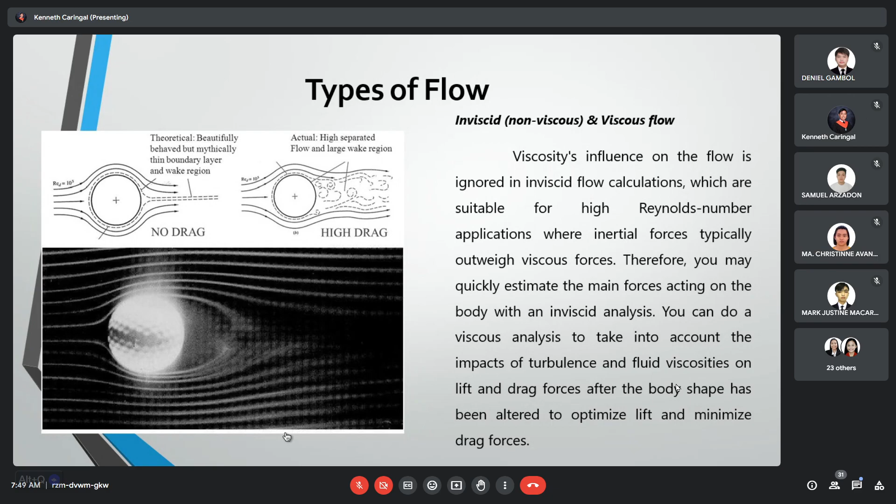Continuing, another area where inviscid flow analysis is routinely used is to provide a good solution for problems involving complicated flow physics or complicated flow geometry. This helps by means of our shape of geometry.

In a case like this, the viscous forces are important, but in the early stages of calculation, the viscous terms in the momentum equations will be ignored.

As you can see in our figure, in theory, there is a beautifully behaved but mythically thin boundary layer and wake region experienced. But in reality, there is a highly separated flow and large wake region. As shown in the actual visualization of this sphere, there is separated flow happening behind it.

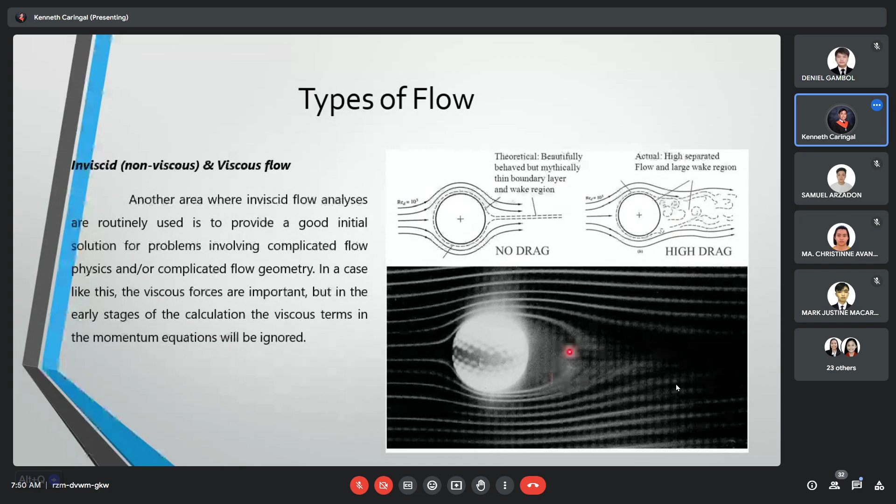Viscosity, or mu, is the ability of a fluid to withstand shearing pressures, and its propensity to stick to solid surfaces is known as viscosity.

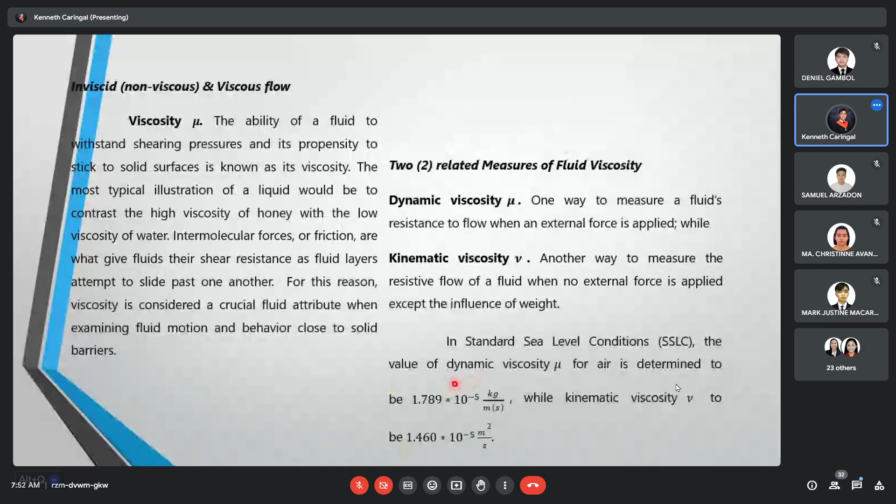Next is the boundary layer. Because of the friction that exists between the gas and the solid material surface, the boundary layer sticks to the surface. In other words, the flow is zero at the surface and there is a small area of retarded flow nearby.

So this is our boundary layer.

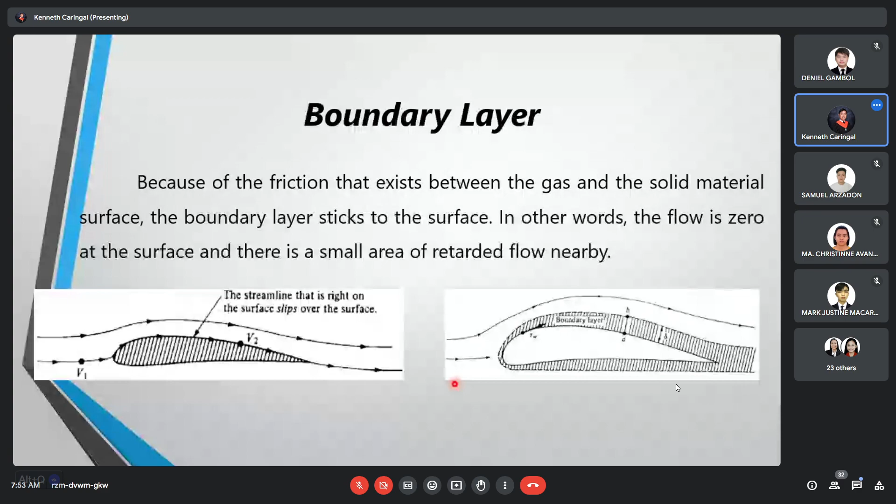The boundary layer thickness d grows as the flow moves over the body. That is, more and more of the flow is affected by friction as the distance along the surface increases. In addition, the presence of friction creates a shear stress at the surface, tau. This shear stress has dimensions of force over area and acts in a direction tangential to the surface. Tau gives rise to a drag force, skin friction drag. That's what creates skin friction drag.

This figure explains the example of a boundary layer where at this point, the velocity is zero. Then the velocity rises up to the free stream. That's why it's elongated - this is at the surface.

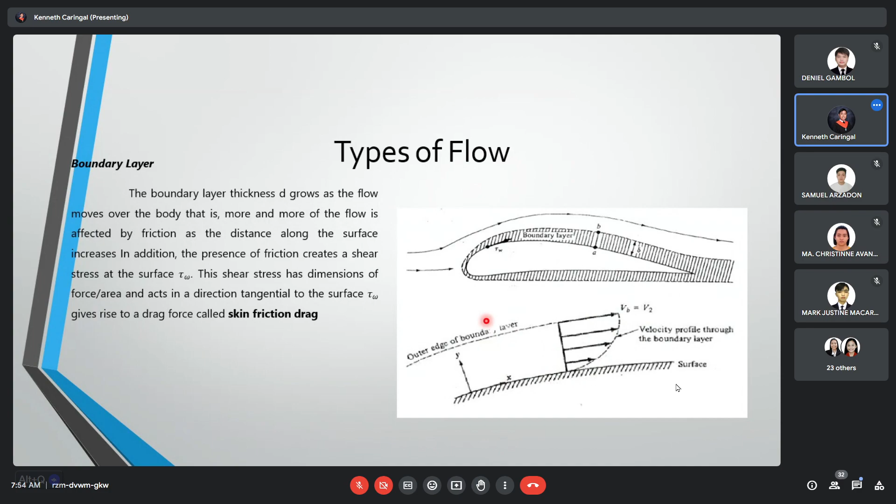Some factors that affect the type of flow in the boundary layer are: first, the smoothness of flow approaching the body; second, the shape of the body; third, surface roughness; fourth, pressure gradient; fifth, Reynolds number; and sixth, heating of the fluid by the surface.

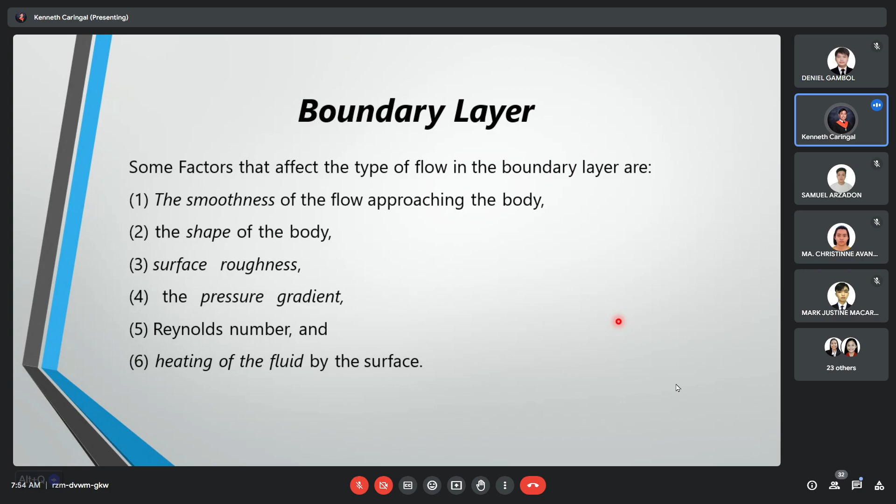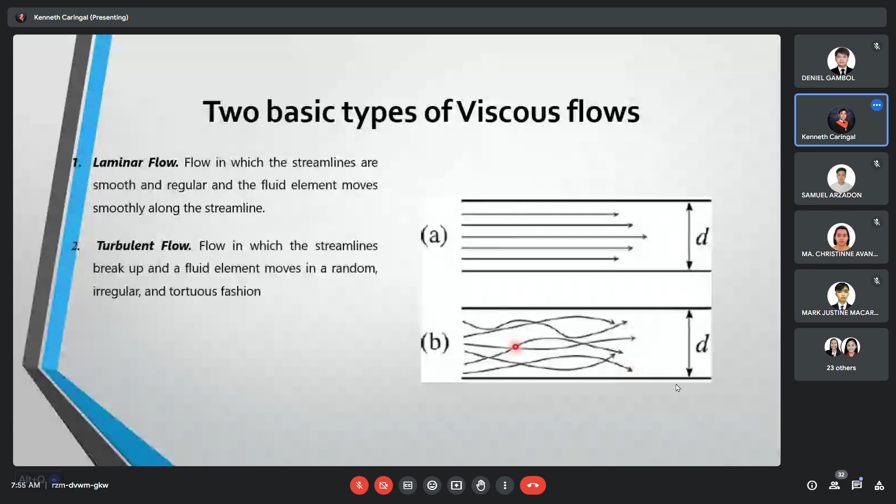Next is yung Reynolds number. Reynolds number is the measure of the ratio of inertia forces to viscous forces. Reynolds number can be used to assess how comparable the aerodynamic flows are in a body and its scaled counterpart. This value can also be used to determine whether the boundary layer is turbulent or laminar in whole or in part.

So meron tayong formula dito. Reynolds number is equal to rho v L over mu, wherein yung rho mo is yung density ng fluid, yung L is yung characterizing length of the flow system, usually the diameter of a pipe. O kaya naman pwede siyang rho vc, wherein yung C mo is yung C denotes as yung chord length. V is yung velocity of the flow, tapos mu is yung viscosity of the fluid.

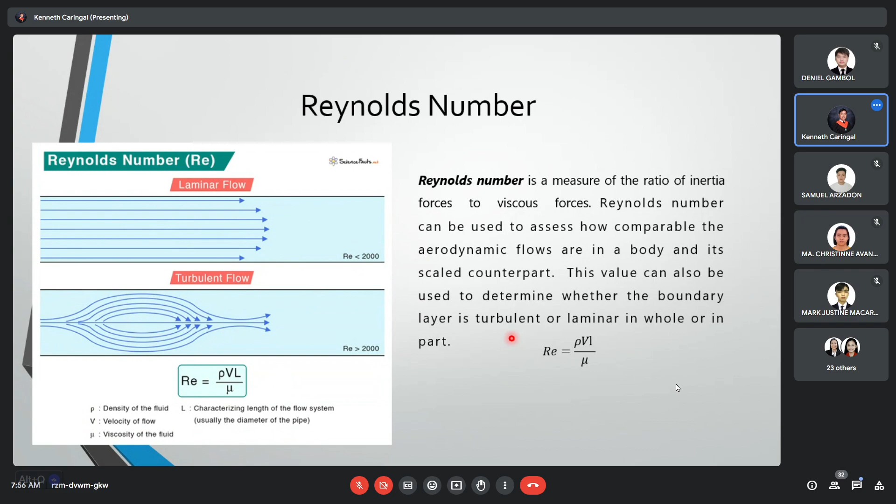So ito may sample tayo. Find the Reynolds number for a model wing of a 3-inch chord. Tests run at 100 miles per hour with standard air. So, given yung chord natin na 3 inches, may velocity tayo na 100 miles per hour at standard sea level conditions.

So, first is i-declare natin yung ating formula, which is yung rho vc over mu or rho vl. Reynolds number is equal to yung rho 0.002377 slugs per feet cube. Tapos 100 miles per hour times 88 over 60. Kaya siya 88 over 60 kasi ito yung conversion factor natin from miles per hour to feet per second. Pwede din naman 22/15, pareho lang din naman yun. Tapos 3 inches times 1/12, which is conversion sa feet natin from inches. All over 3.7373 times 10 to the raise to -7 slugs per feet second.

Tapos ito yung value nung na-convert na, 146.667 feet per second tsaka 0.25. So since na-convert na, pwede na nating i-calculate diretso. Ang ating Reynolds number is 233,207.574.

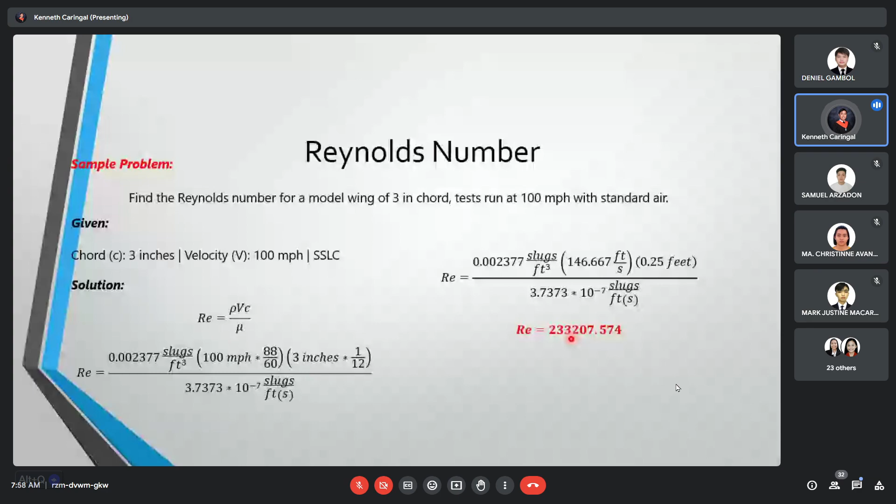So velocity profiles for laminar and turbulent layers. Dito i-discuss natin yung relationship between laminar and turbulent shear stresses. The skin friction exerted on an airplane wing or body will depend on whether the boundary layer on the surface is laminar or turbulent, with laminar flow yielding the smaller skin friction drag.

Laminar flow can be obtained in the design of the shape of an airfoil. This special type of airfoil designed to encourage yung laminar flow is called yung laminar flow airfoil. Tapos yung standard shape airfoils naman are more prone to having turbulent boundary layers and hence mas malaki yung skin friction drag na nag-occur sa kanila.

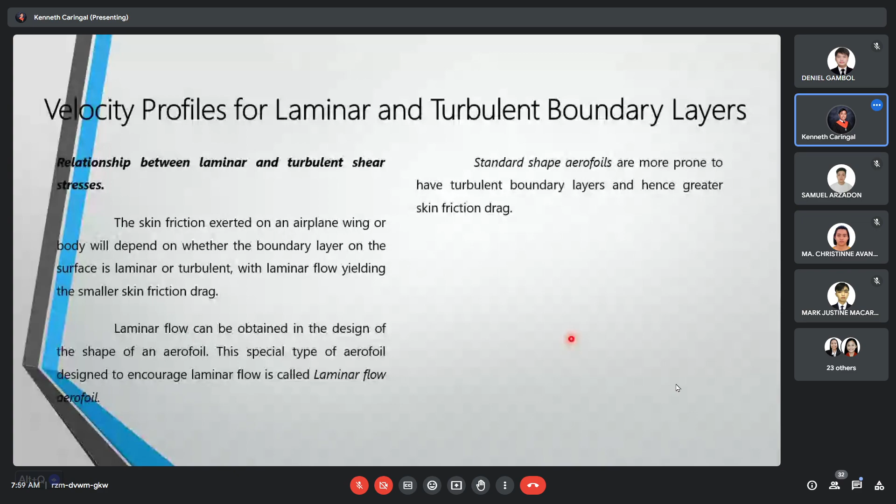So advantage and disadvantage of laminar airfoil. Advantage ng laminar is low skin friction drag. Tapos it has high speed properties postponing to a higher flight Mach number, and the large drag rise due to shock waves and flow separation encountered near Mach 1.

Tapos yung disadvantage naman nun is it readily gets unstable and tries to change to turbulent flow. Example is yung slightest roughness of the airfoil surface caused by real-life effects as protruding rivets, imperfections in machining, and bug spots can cause premature transition to turbulent flow in advance of the design condition.

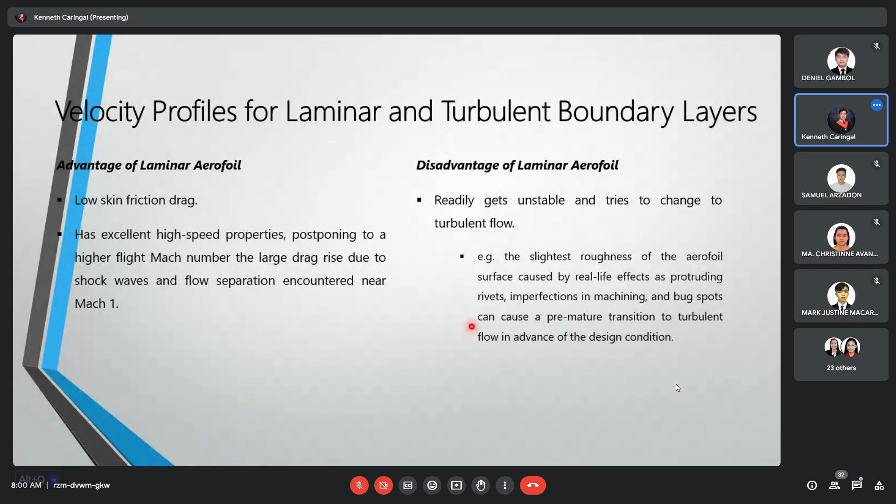So ito is yung formulas natin para sa laminar boundary layer. First is yung laminar boundary layer thickness, which is equal to 5.2 times x all over square root ng RE sub x. Wherein yung RE sub x natin is yung local Reynolds. Tapos yung RE sub L natin denotes as yung total Reynolds.

Tapos, laminar local skin friction coefficient or CFX is equal to 0.664 divided by square root ng ating local Reynolds number. Tapos yung laminar flow's total skin friction drag coefficient CF is equal to 1.328 all over square root ng ating total Reynolds number. Tapos yung drag force natin is QSCF.

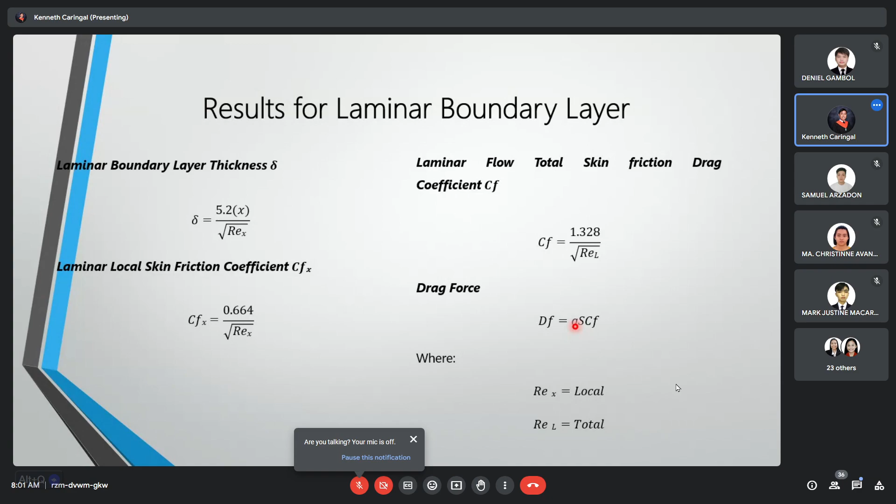So, ito may sample problem tayo. Consider the flow of air over a small flat plate that is 5 cm long in the flow direction and 1 meter wide. The free stream conditions correspond to standard sea level and the flow velocity is 120 meters per second. Assuming laminar flow, calculate the boundary layer thickness at the downstream edge. So first, i-declare natin yung ating given na 5 cm, tapos yung velocity is 120 meters per second.

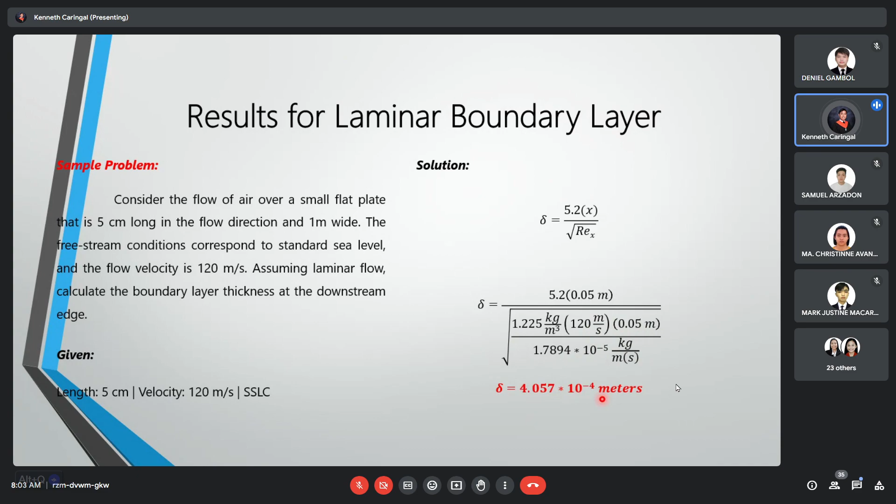So ito yung laminar boundary layer thickness is equal to 5.2 times x all over square root ng local Reynolds number. So 5.2 times 0.05 meters, ito ay nanggaling sa conversion ng 5 cm to meters. Tapos square root ng Reynolds, which is rho VL over mu in SI, 1.225 kg per meter cube, quantity 120 meters per second times 0.05 meters all over 1.7894 times 10 raised to negative 5 kg per meter second. So ang ating laminar boundary layer thickness is 4.057 times 10 raised to negative 4 meters.

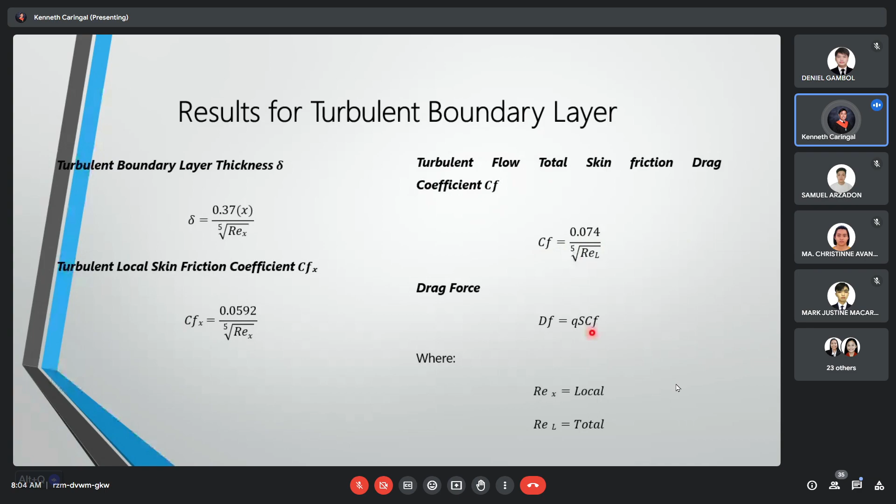So same given tulad ng kanina, pero ngayon ang kukunin naman natin is yung turbulent boundary layer. Turbulent boundary layer thickness is equal to 0.37 times x all over fifth root ng local Reynolds number. So turbulent boundary layer thickness is equal to 0.37 times 0.05 meters all over fifth root ng 1.225 kg per meter cube times 120 meters per second times 0.05 meters all over 1.7894 times 10 to raised to negative 5 kg per meter second. So ang ating turbulent boundary layer thickness is 1.395 times 10 to raised to negative 5 meters.

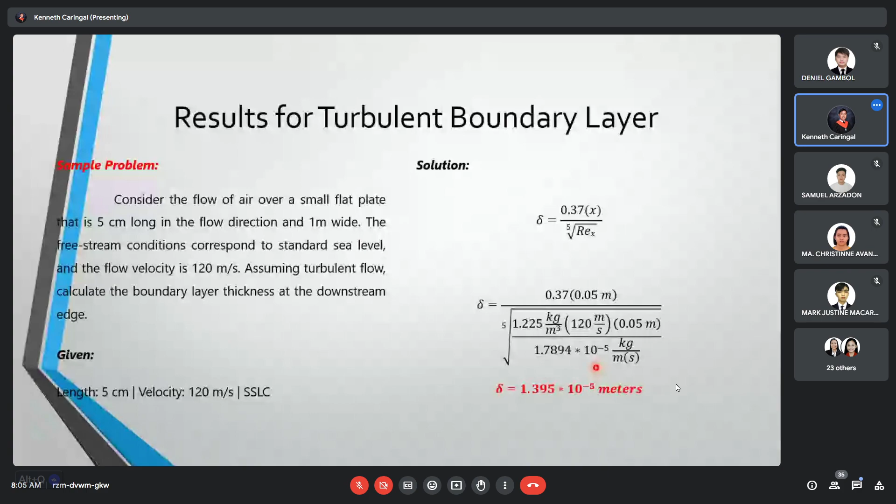So meron tayong sample problem. The span of the Wright Flyer wing is 40 feet 4 inches. Planform area is, assume the is rectangular. If the flyer is moving with a velocity of 30 miles per hour, calculate the skin friction drag with transition Reynolds number is 6.5 times 10 raised to 5. Given natin 40 1/3 feet. Wing area is 255 feet squared. Velocity is 30 mph. Tapos yung ating transition Reynolds number is 6.5 times 10 raised to 5 SSLC.

Hello, good, clear ba? Good morning. Yes po, sir. Sorry na walang lang ng net. Ask ko lang saan tayo tumigil or saan ako na disconnect? Dito ba? Sa transition flow or before pa? Sige, continue na lang tayo dito.

So, ayun nga, meron tayong para sa transition flow na problem, meron tayong given na 40 and 1/3 feet. Tapos wing area is 255 feet squared. Tapos ang velocity natin is 30 miles per hour. Tapos meron tayo ng transition Reynolds number na given which is 6.5 times 10 raised to 5 at SSLC. Tapos hahanapin muna natin yung total Reynolds number. So 0.002377 times 30 times 88 over 60 which is yung conversion factor ng miles per hour to feet per second. Tapos di-divide natin yung wing area sa width which is 255 feet squared all over 40 and 1/3 feet all over 3.7373 times 10 raised to negative 7 slugs per feet second.

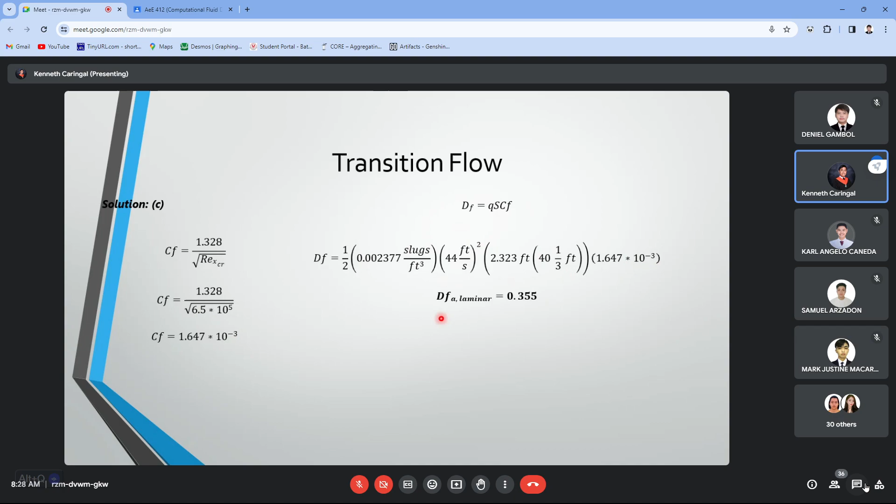So DF is equal to QSCF, 1/2 times 0.002377 times 44 feet per second squared times 2.323 feet, quantity 40 and 1/3 feet, times 1.647 times 10 raised to negative 3. DFA laminar is 0.355.

Next, final is DF total is equal to DF ng laminar plus DF ng turbulent. So DF total is 1.702 pound force. Pero considered as one surface lang yon, kaya ita-times 4 mo siya. Kaya ang DF total natin is 6.808 pound force.

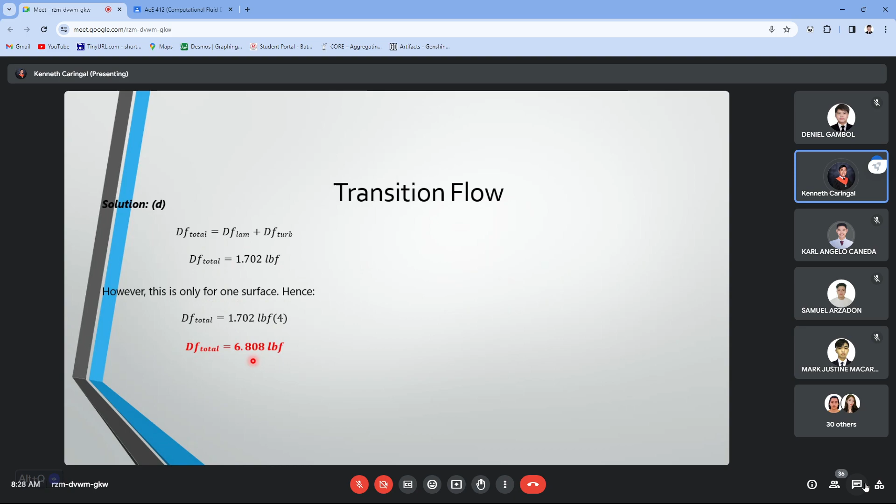So, moving on, ito yung flow visualization techniques natin, which is yung conceptual part ng ating discussion. The flow of fluids can be analyzed by theory, numerical computation, and experiment. In all kinds of fluid flow research, visualization is an important tool in experimental fluid mechanics, which can provide yung overall picture ng flow field. By applying some methods of visualization, yung flow pattern can be observed directly or recorded using yung camera natin. So ito, mga figures. Ito yung airfoil natin.

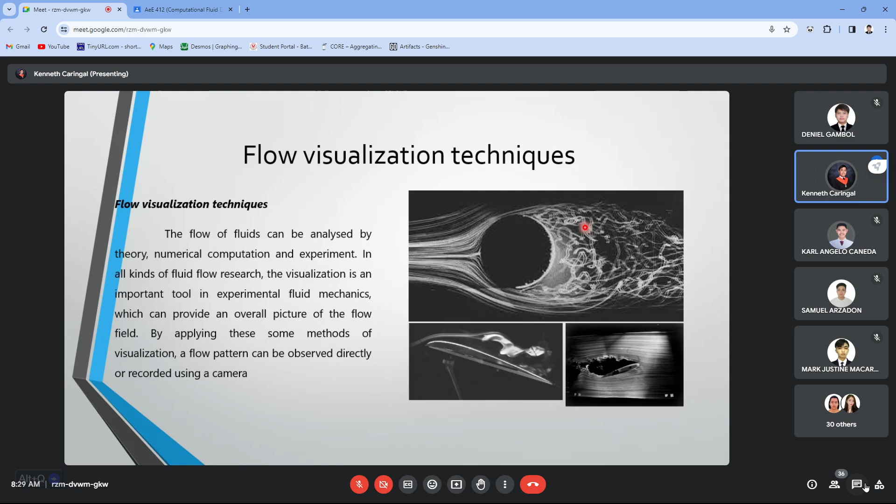So surface flow patterns, the rates of shear forces, pressure forces, and heating loads exerted by a fluid flow to the wall of a solid body are subject of many studies. Visualization of the flow pattern very close to or at the body surface can be helpful for such studies. Many methods of surface flow visualization are making use of coating the surface with a material that interacts with the flow and thereby produces visible information.

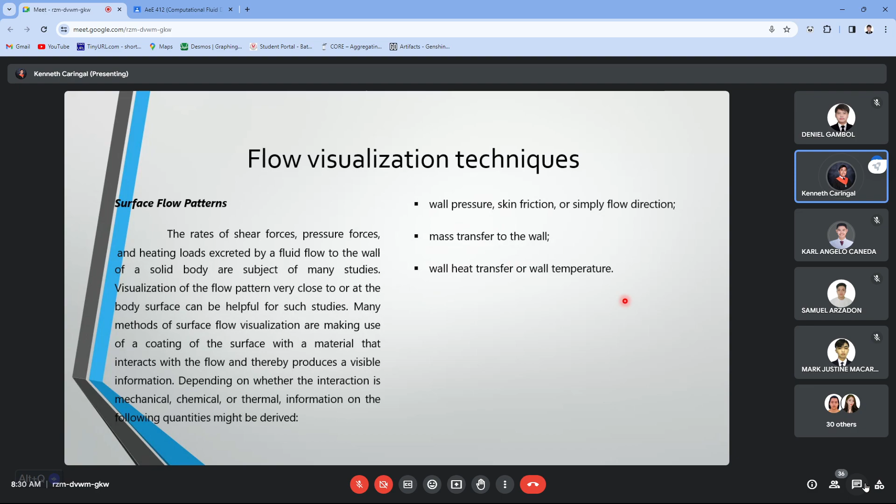Ito ay depende kung mechanical, chemical, or thermal yung information. Yung following quantities might be derived: wall pressure, skin friction, or simply flow direction, yung mass transfer, o kaya yung wall heat transfer, or wall temperature.

Ito ang isa sa mga surface flow patterns na flow visualization, which is yung oil film. Ito ay naging standard practice na for several decades sa wind tunnel. So the surface of interest is coated with a thin layer of oil in which a finely powdered pigment is dissolved. When the wind tunnel is on, yung oil natin is carried away with the airstream and the dry pigment remains on the surface where it forms a streaky pattern. So, nadadala yung oil, pero may dry pigment na nagre-remain sa surface na kung saan yun yung nagpo-form ng streaky pattern sa atin, indicating the direction of the flow close to the surface. Particular phenomena in the remaining pattern are attributed to the flow separation from the surface or flow reattachment.

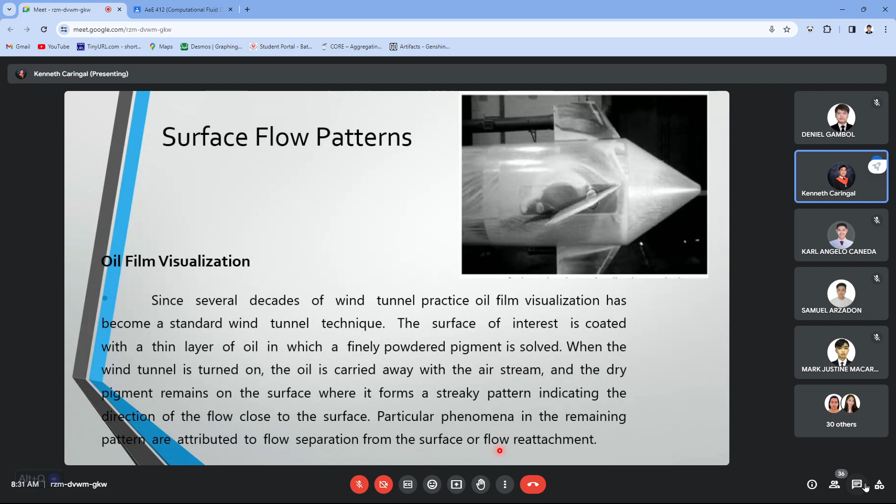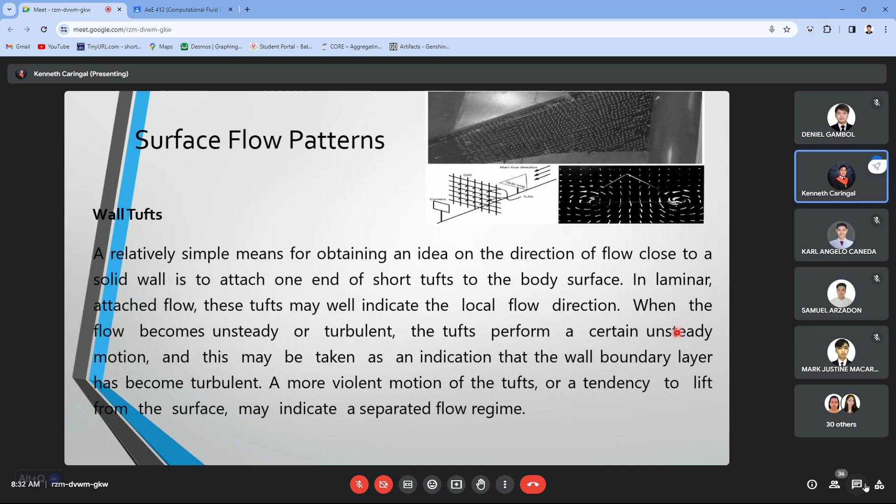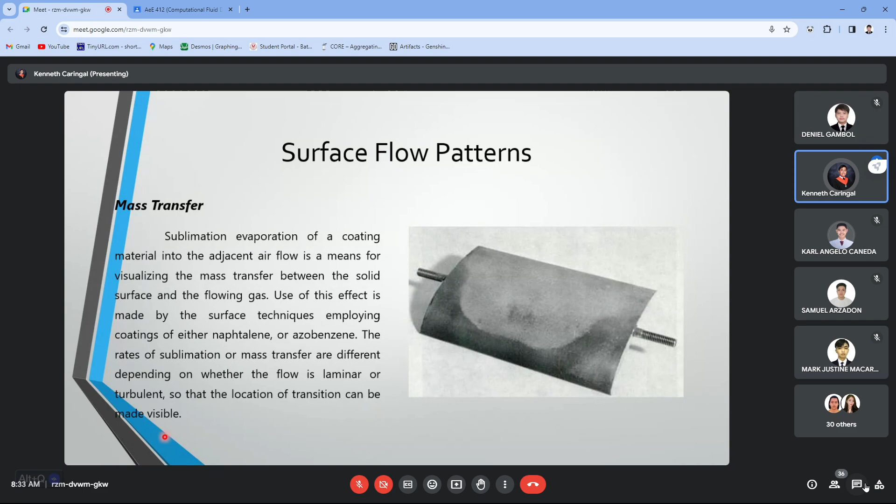Meron din tayong tinatawag na TSPs and PSPs, yung temperature sensitive paints o kaya pressure sensitive paints. Pressure sensitive paint is essentially a luminescent dye dispersed in an oxygen permeable binder, also known as oxygen quenching. The paint which contains these luminophore molecules are then illuminated with a light source emitting light of short wavelengths, commonly performed by passing a light.

Ginagamitan din tayo ng ultraviolet filters para mas effective, through blue or ultraviolet filters in order to excite the paint. Returning to its ground state, the collision of luminophores and the oxygen molecules causes the paint to emit light with less intensity. Another form of surface interaction using TSPs uses the same approach ng PSP pero wala siyang oxygen quenching.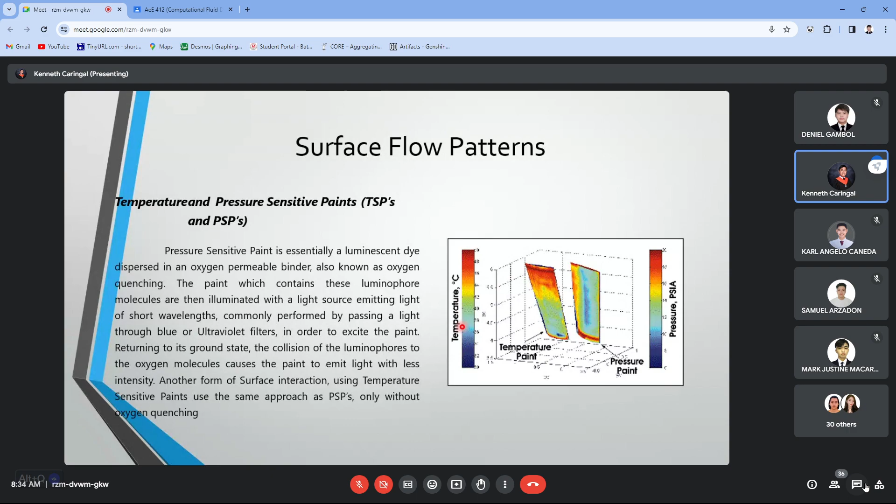Next is flow visualization techniques sa tracer particles na rin. The injection of a foreign visible material is a traditional means of flow visualization. Most commonly, yung dyes ay ginagamit sa tubig tapos smoke naman sa airflows natin.

The material is released from a particular position, thus making a specific line in the flow downstream of that position. Or the material is filling a complete regime in the flow and it marks the boundary and therefore the geometric extension of such regime, provided that there is little mass exchange across the boundary. The latter is of interest for visualizing separated flow regime.

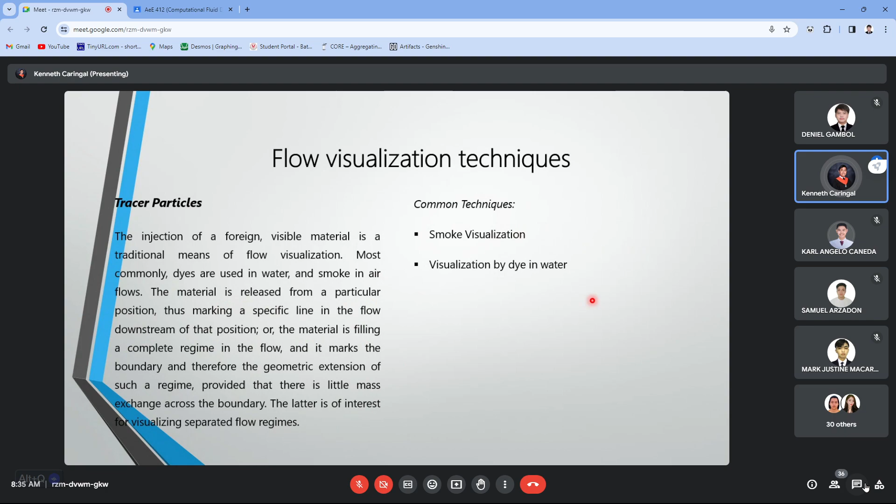Meron tayong dalawang common technique which is yung smoke visualization tsaka visualization by dye sa tubig. Smoke visualization, hindi siya restricted sa combustion lang. Pwede rin siya sa steam, vapor, mist, and aerosols. From the usual requirement that one wants a tracer material to fulfill, namely being neutrally buoyant, being non-toxic, tsaka having low mixing rates with the main fluid.

So as you can see, ito yung smoke visualization natin at different angles of attack. Ayan, kita nyo, nagbabago na yan, at dito ay turbulent na talaga at alpha is equal to 14 degrees angle of attack.

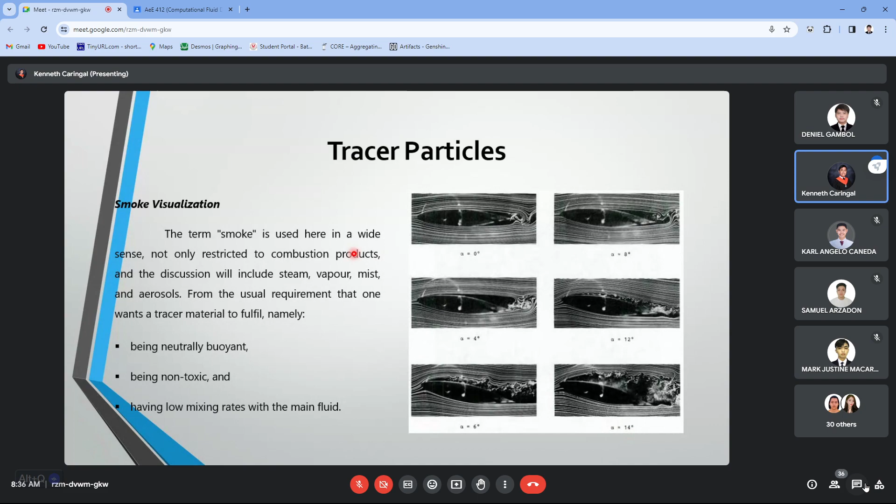Next is yung visualization by dye in water. Kasing popular din siya ng smoke in air flows. Pero unlike smoke, appropriate dyes can fulfill almost any requirements of an ideal tracer. Meron siyang neutral buoyancy, high stability against mixing, tsaka good visibility. So ito yung figure ng ating visualization by dye.

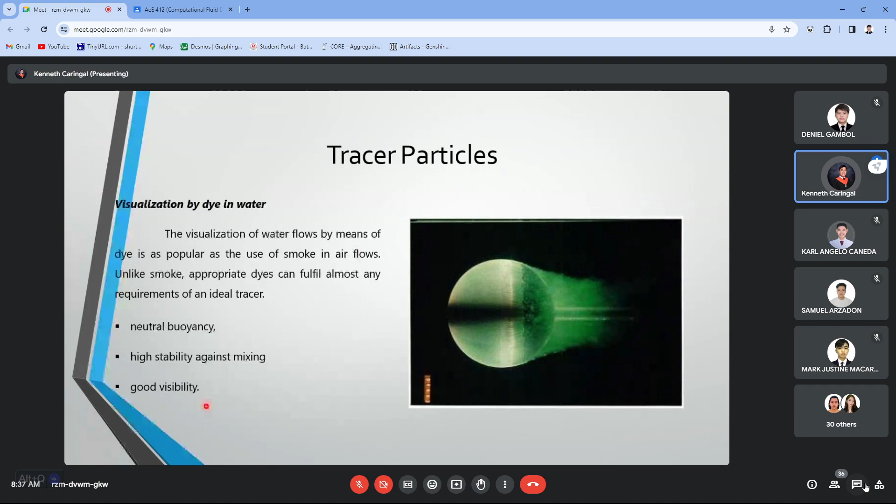Tapos, flow visualization techniques with optical methods. In terms of optical methods, the density of a fluid is a function of the fluid's refractive index. A number of optical methods are known by which variations of the refractive index in a transparent medium can be visualized and or measured. Itong methods na to ay ma-apply to the study of such flows that are associated with density changes caused by compressibility, thermal effects, or mixing of fluids of different densities.

Very common is the use of these methods in high-speed wind tunnels, ballistic ranges, and shock tubes. Common techniques, meron tayong shadow graph at saka Schlieren.

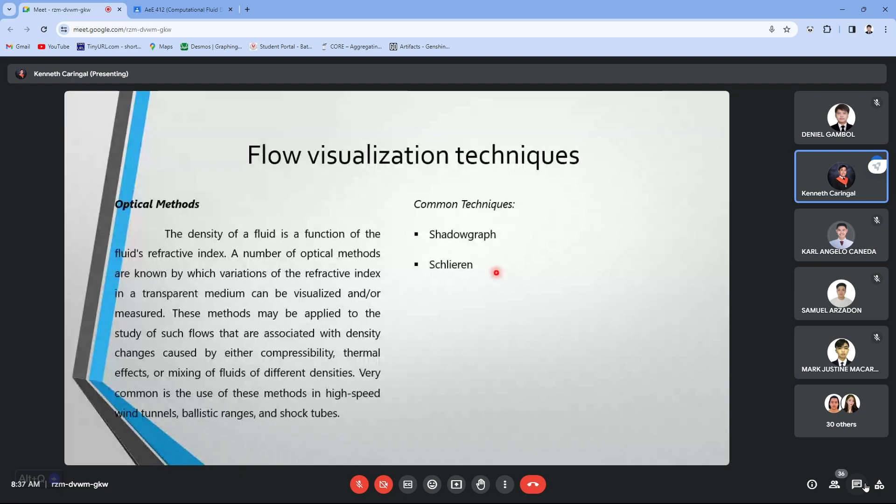First is yung shadow graph. Scientifically explored first by Dvorak, is the simplest of the optical visualization methods. Hindi siya nagre-require ng kahit anong optical element except yung light source and the shadow effect produced by the refractive index fields. Therefore, outside laboratory in the open air where the sun serves as a light source, pwede yun.

Examples are the shadow patterns of rising warm air or benzene vapor projected by the sunlight onto the rigid surface. Ayan, ito yung bullet natin na nakikita nyo yung shockwave. Ito ay by means ng shadow graph natin, which is essentially nga for high speed visualization.

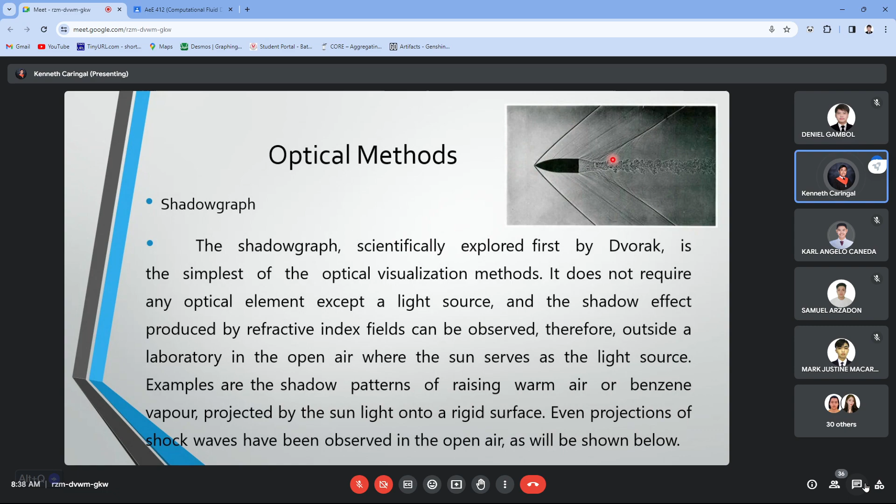Next is yung Schlieren system naman na actually somewhat similar sa shadow graph, pero ang pagkakaiba nito ay sensitive siya with respect sa density changes, yung Schlieren natin. The parallel light beam is made convergent by a lens or a spherical or parabolic mirror called yung Schlieren head. An image of the light source is formed in the focal point of the Schlieren head. At this position, a knife edge perpendicular to the plane is cutting off a certain portion of the light source image, thereby reducing the intensity with which the recording plane is illuminated.

The camera lens focuses a plane in the flow field onto the recording plane so that yung shadow effects are eliminated. So ayun nga, as said kanina, ito ay somewhat similar din sa ating shadow graph pero in terms of density changes ang basis.

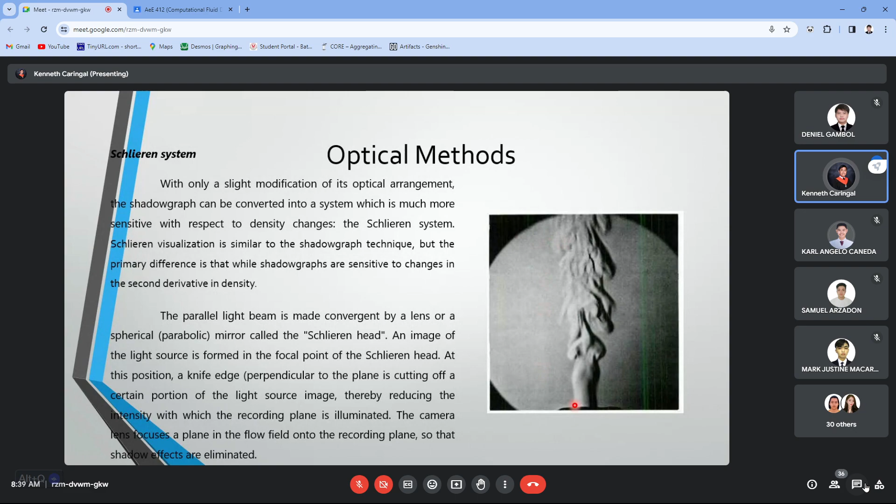Okay, may questions ba? Wala naman po. Okay, sige.